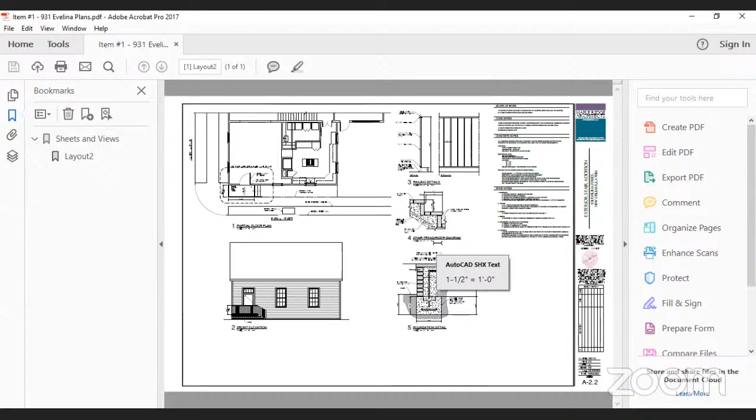Okay, this should be item number 1, which is 931 Evelina Street. Okay, what is the consideration for item number 1? Consideration for item number 1 is a request for a servitude of air and ground rights for steps, landings, and railings over the Evelina Street right-of-way adjacent to the 5th Municipal District, Square 114, Lot 1 and 2. The municipal address is 931 Evelina Street.

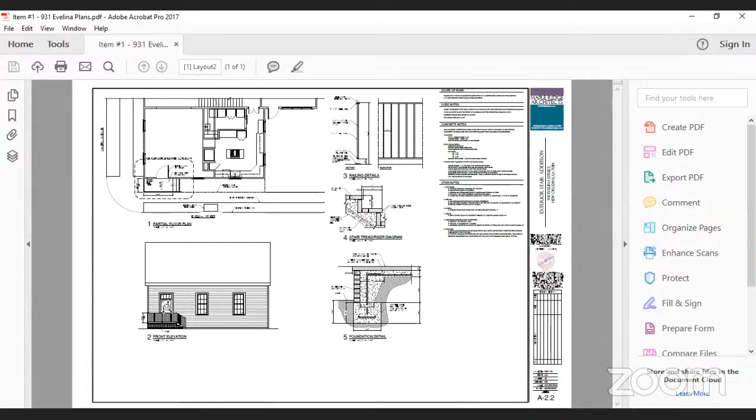I'm not sure if the property owner is here. I don't see him here. Okay, so it's the steps on.

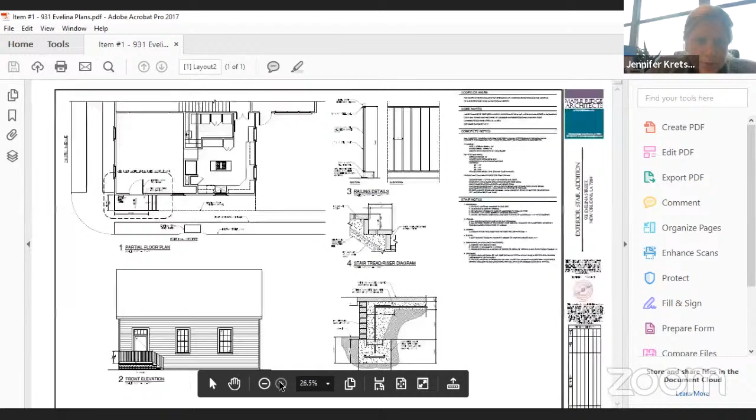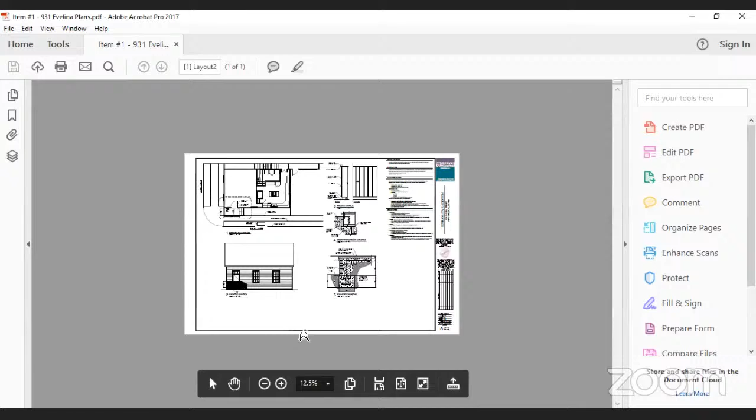Can everybody see my screen? Yes. Okay. Does anyone have any comments?

Oh, I do, Jen. The property owner just sent in some updated plans showing a measurement of the sidewalk. Okay, I can send those to you. And also I can forward those to the committee. I think that would be the information that we need. Don't you agree? What is the width?

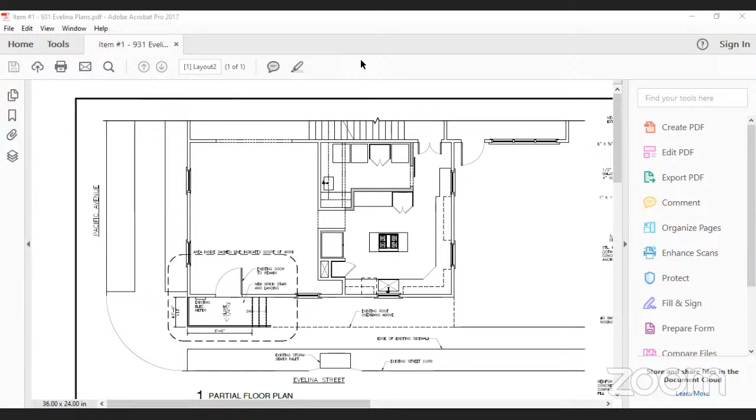Not wide enough. Okay, I'm sending those over now. All right, sorry you guys, bear with us. People sending stuff in at the last minute. That's not cool. Well, I didn't want them to miss the deadline, so I just got them on. I understand.

In the meantime, looks like the HDLC wrote a permit for this work back in November for landing and handrails. You know, what's been presented in the plans that we have don't seem to match what's out there. I don't know if HDLC verified any of that.

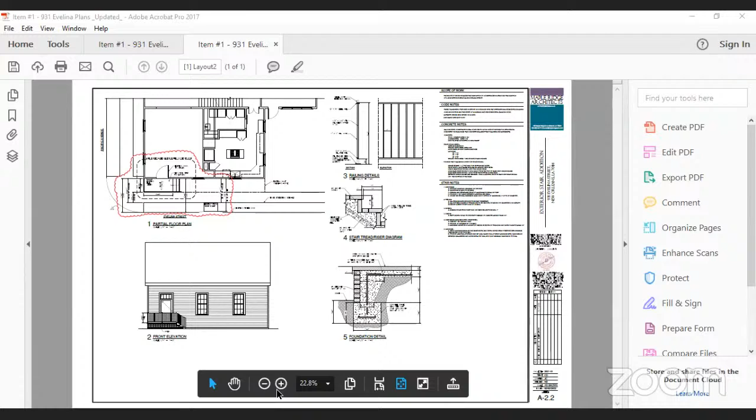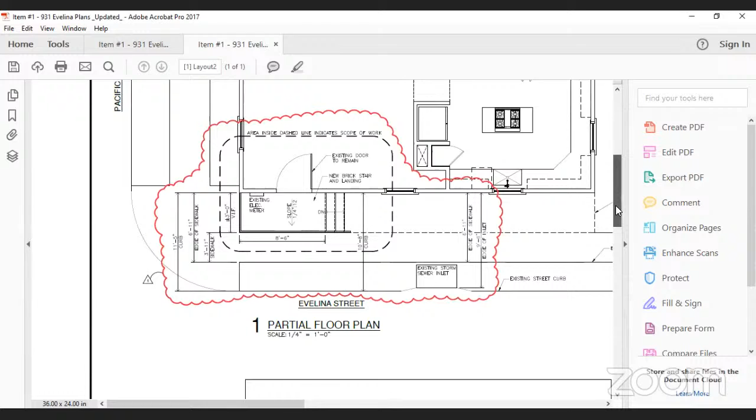So this is to build a landing at the front door? Because that's what we approved back in November. All right, I think there's a stoop there, no, not a stoop, but 3 steps that goes up to the front door. Right. Is this a new house? Because there's not a 3-foot awning on this house. The house I'm seeing looks pretty old.

I don't know. I don't get it. It doesn't look like plans.

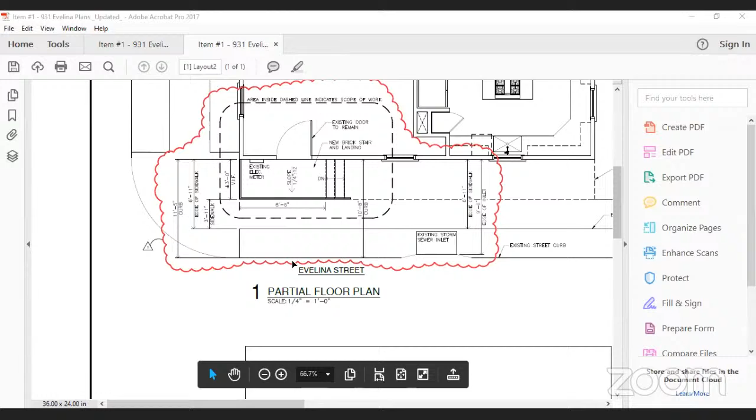I mean, I can see it, but they're showing the sidewalk being 3 feet from the house, same as the eave of that roof. And that's just not the case. Doesn't look anything like that. I mean, this is just another fantasy plan that we get sometimes.

Okay, so Lewis, since I'm not looking at it, let me pull it up so that I know what you're talking about, because I don't know how to resolve this without. So what you're saying is what?

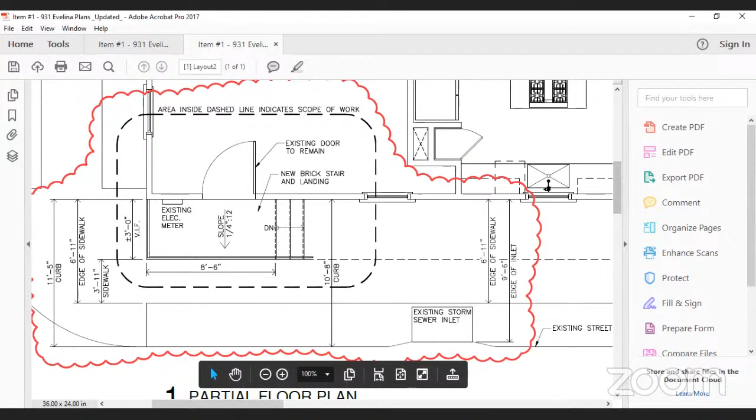What I'm saying is that this doesn't seem to match existing conditions of what they're saying. I mean, what I'm looking at is a fire hydrant, a 4-foot brick sidewalk that's basically against the house, or basically under the overhang of this roof, along with these very short stairwell.

And it seems like they're acting like there's a 3-foot overhang on this house and everything's going to fit neatly under it, and the sidewalk isn't under the overhang of the house, and that can all fit behind an existing catch basin. The catch basin is only 5 feet from the house, there's a fire hydrant that's 5 or 6 feet from the house, so none of this is really... doesn't seem correct.

I agree, yeah. So it's just a made up plan, you know? Is anybody else looking at the street view? Or do you want me to pull up the street view to see what I'm talking about? Does anybody else?

What would be a solution to this, Louis? We would ask them to provide stamped plans from a licensed surveyor. I don't need anything stamped, I just need an accurate drawing. They've been called out. I don't know who drew this, but unless that street has been rebuilt or the house has been rebuilt recently, maybe it has, maybe a year ago on Street View is too much.

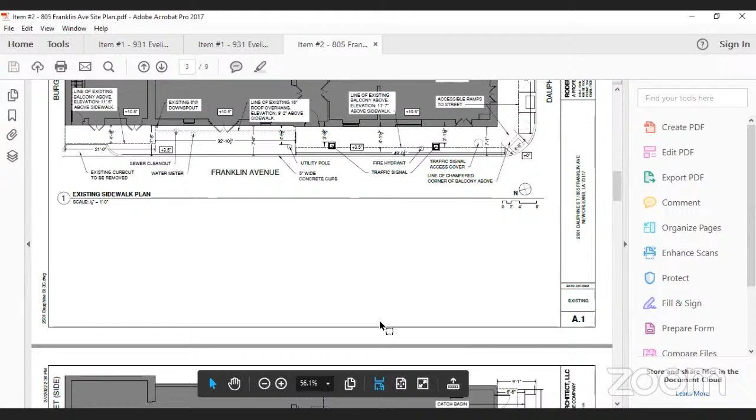And I've already confirmed with HDLC that that existing gallery, that wraparound gallery and the balcony on, I guess, the Burgundy Street side, they're historic. And they're proposing a new awning and also some sidewalk modifications on the Franklin Avenue side in between the 2 existing encroachments.

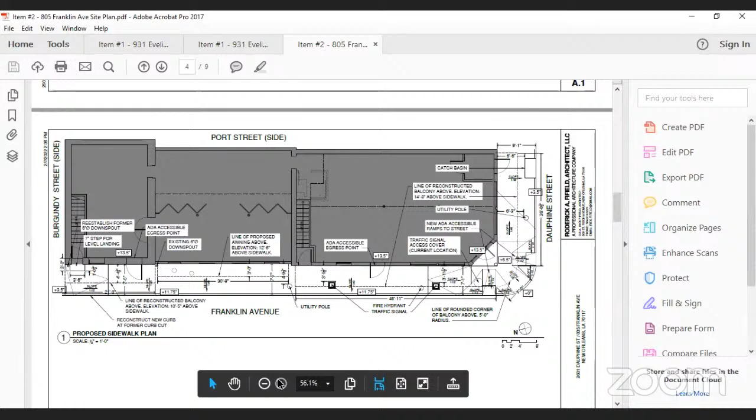Okay, do we have any comments concerning this? This is under review with the HDLC. Looks like they went to commission, and we may be waiting for final drawings. It's not too specific, but it does say approved at commission, so I'm supposing we're waiting for final drawings.

My only comment that you could relay back to them is they're indicating new accessible ramps, new ADA ramps on the corner, unless there's some pressing reason why. I mean, we just rebuilt those corners, so they certainly don't need to replace them. They could just tie into them.

Hi, this is the applicant. Hey. You just faded out, sorry, can you hear me? You're very low volume. Can you hear me now? Sorry, I'm trying to increase my volume somehow. Yeah, we can hear you.

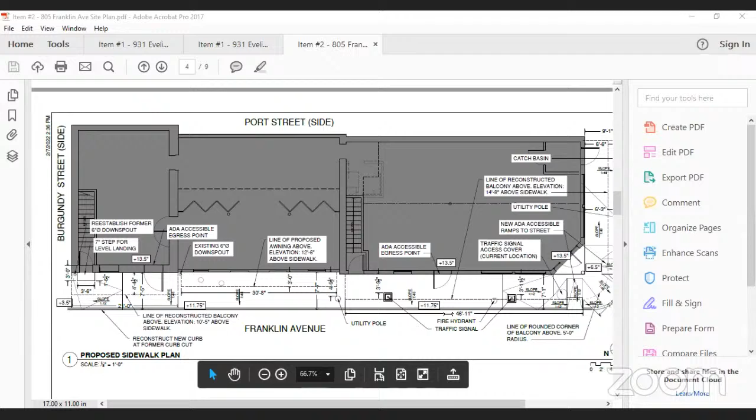You need to raise the bottom of those two doors at the corner 10 inches. The entire building will be lifted and then the first floor rebuilt.

Do you have an entrance? Will you have an accessible entrance at that first door? The goal is to have 2 accessible entrances to the property. Which 2? And all of these openings are going to change. That middle building will be demolished and rebuilt as a 2-story structure.

So I'm seeing, all right, so I got 2 out swinging. Let's see, hold on, let me look at your new plans. All right, I got you. I see the slope going up.

I don't want to have to hammer it too much on this one, but we'll need to work on it. It's possible, we need to work a little more, I think, with you, just making sure we get these small areas fixed up.

And I don't know if you're going to be able to do 2 ramps on the corner anymore. We may just have to go to 1 ramp or something. Although, you got some kind of column on the corner, huh? On the corner, there's a traffic signal access cover that's kind of conflicting with our proposed ramp, as well as a traffic signal.

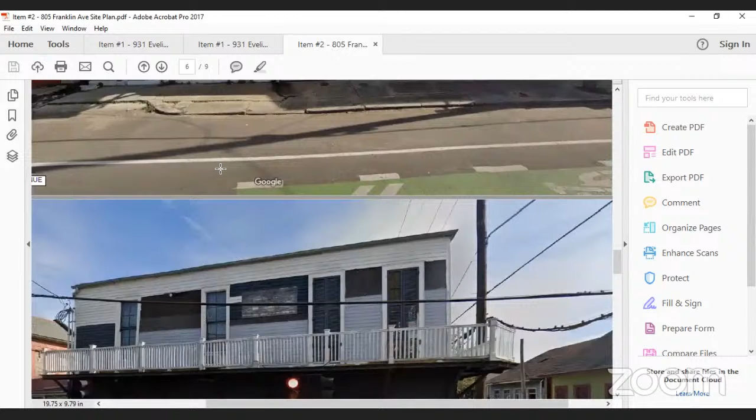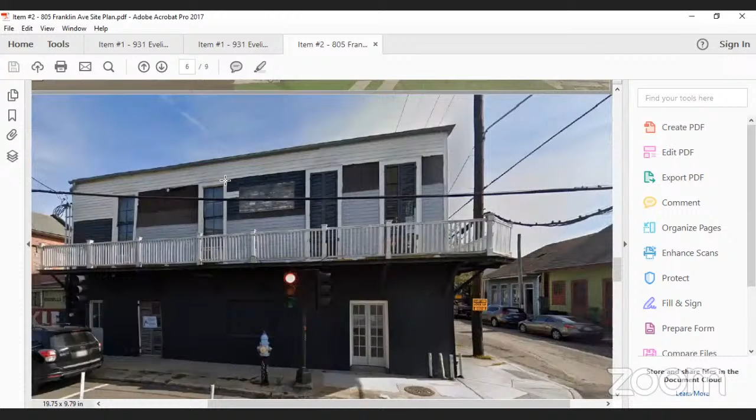How high are you proposing your curb to get? If you go to the proposed plan, it's called out there. It would be about close to 12 inches.

And then you're going to have a drop. You're going to ramp all the way from the street up. And with a new building, you're probably going to need to have street trees in there somewhere.

I don't see that as possible to put any street trees there. There's galleries, utility poles and traffic signals, and the sidewalk in front is about 75 feet long on Franklin, where you say you're demolishing a building and building new. Usually with that sort of thing, you're required to put in street trees.

Yeah, about where that mouse was, right above Franklin Avenue, you're right around in there. So you're going to need to figure out what sort of drop you're going to have, because usually we reestablish a green space.

There's no existing green space on this sidewalk. I understand that, but normally when you build a new building, you're asked to reestablish a green space. I'll defer to Stephen on that, but we wouldn't do a green space here on Franklin. There would be conflict with the power lines there, so I don't think it would be possible. There are trees that exist under power lines, sir.

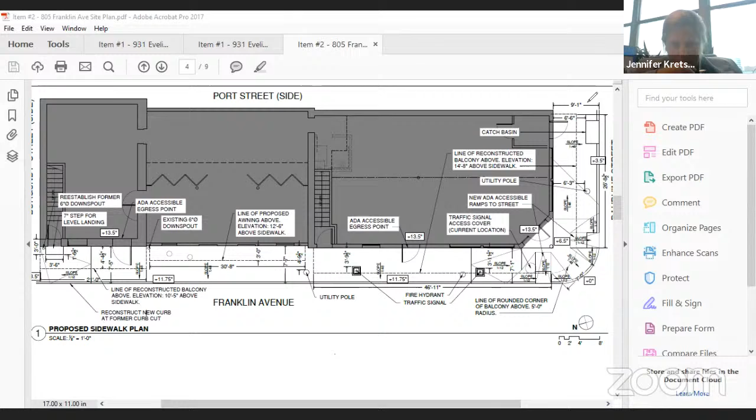No, I don't have any comments. Just have to look out for any - I see you have a sewer clean out and a water meter. Is that where there's a ramp going on Franklin Avenue? Yes, that would be an elevated area. So we have to adjust the sewer clean out and the water meter accordingly. Okay, but it won't be blocked or anything? No, they can remain in the same location, just raised up.

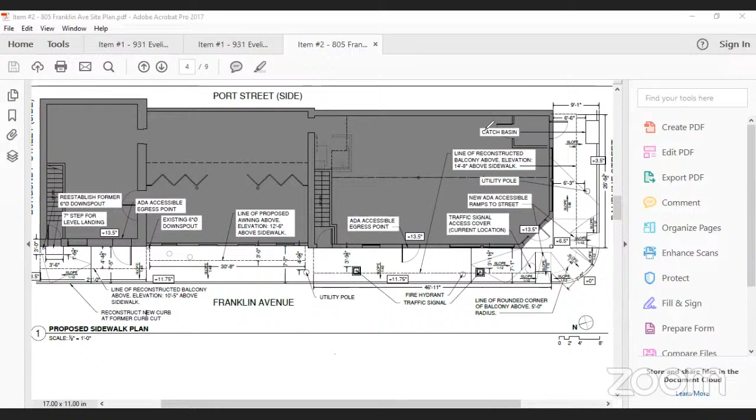That's all I have. Jeremy, is there an issue with this utility pole in the proposed awning? The utility pole I don't see an issue with, but I would like to see more details about the sidewalk, because we do have gas lines under there, and I just want to make sure that they would be okay. Okay, so you want to be looped in on their updated plans? Yes, please.

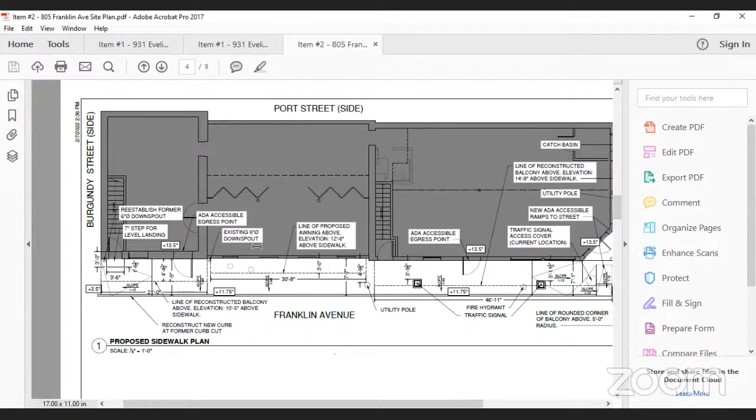CPC, any comments? No, no comments. Thank you. All right, anybody else? Okay, thanks, Mr. Murray. Thank you. I'll be in touch with you on the follow-up. Okay, thank you.

Next item is number 3, and I think it's a reconsideration from two weeks ago, so hopefully it's still somewhat fresh in our minds. Yeah, this is for the ramp, railings, and outward swinging doors over the Freret Street right of way. The municipal address is 2505 Washington Avenue.

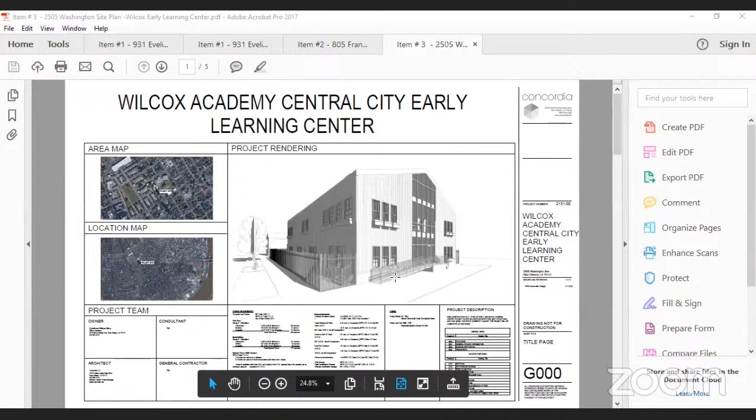Ashley, there are outward swinging doors on the Washington Avenue side for the dumpster. Yeah, we wouldn't allow those outward swinging doors or outward swinging gate for dumpsters, so you would have to find a way to move those within the property line. Noted, thank you. And this is the applicant.

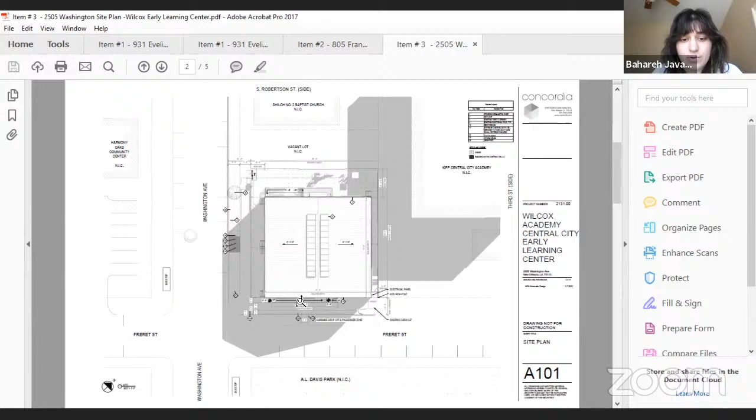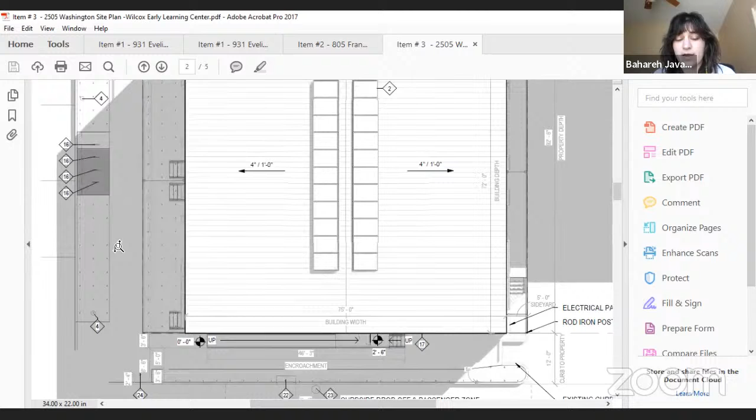So we're just coming back to you after incorporating the feedback that we received from you all a couple weeks ago, with a reduced encroachment request. If you zoom in there, you can see what we modified in the ramp layout. Now we are asking for a 3.5 foot deep by 46 foot 3 inch long ramp and stair footprint, so a total of 162 square feet. This allows for 8.5 feet from the edge of the proposed encroachment to the curb, as well as 5 foot clear for ADA, and then a 3.5 foot landscaped easement where we could plant grass and any required street trees. We also modified the bike parking layout per the comments we received along the Washington Avenue side.

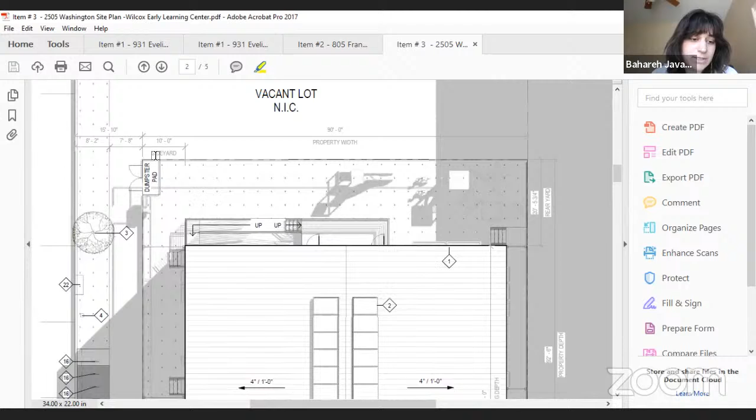And I've made a note about the dumpster doors. We'll adjust that as well.

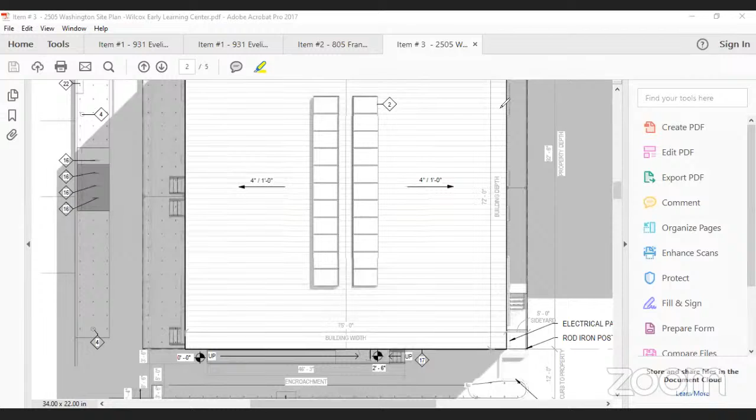While Lewis is gathering his thoughts - in reference to the dumpster, usually you have a curb cut or something to get your dumpster to whoever's picking it up, so I'm not sure whether you're going to have a curb cut or how you're going to get that over to the street to get it picked up. The other thing is you're going to need tree protection, which is 1 foot for every inch of DBH, 1 foot radius, and those are about 30 inches, so that's at least 30 feet.

Okay, so you might want to move your dumpster a little further. Well, wait a minute, is that the end of your property line? That is where the dumpster is, it's at the very far corner. Okay, because I'm thinking that might be problematic. We'll have to have our arborist review as to what paving or how you're going to be able to handle that.

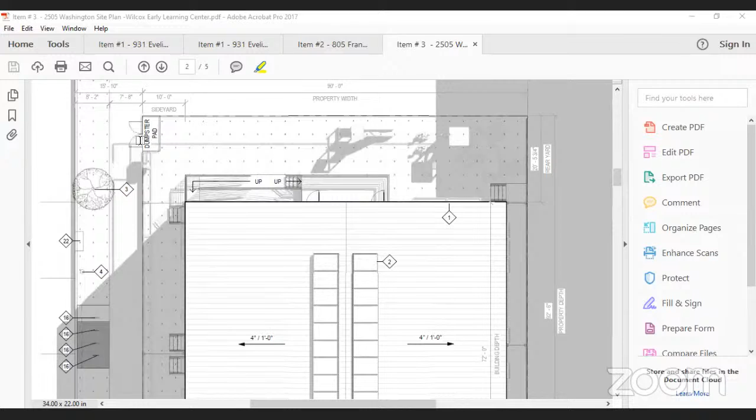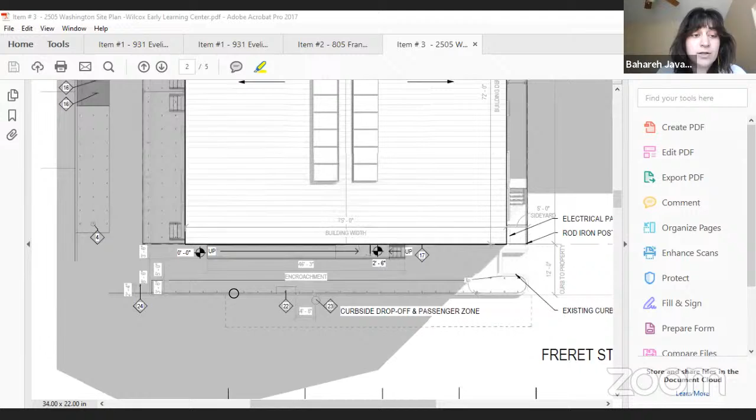And maybe, Stephen, I don't know - I'm assuming you're going to have some tree planting on this. Yeah, we're not showing any because I wasn't sure yet the extent or how many trees would be required, but there's certainly room for it. On the Washington Avenue side, I have a little bit of concern. I know you had mentioned last time that we would be required to plant live oak trees on the Washington Avenue side - that existing live oak tree on the Washington Avenue side has a pretty wide canopy.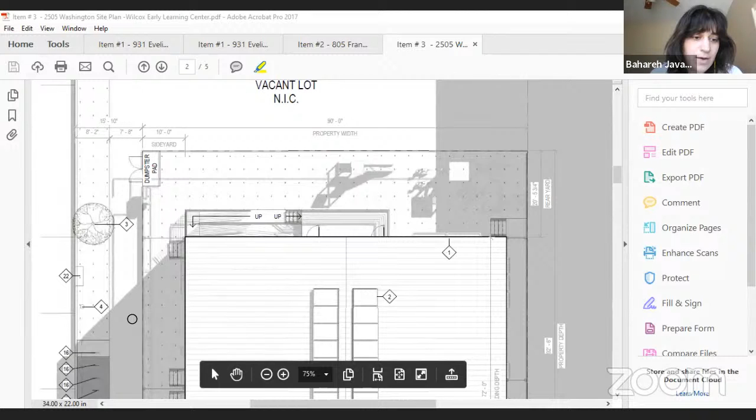If you look at it on Google Street Views, you can see what I'm talking about. I'd be a little concerned about where it's located in terms of the center of the tree trunk, and how much room there would be to plant another live oak tree, which would eventually have another large tree canopy. So that would be something we'd want to work out with you all.

Well, we'll be glad to work with you on that. But usually, if someone's scrolling faster than I can watch... anyway, there may indeed be room, or we'll go with a smaller tree. Usually we like to go with the live oak to continue the canopy. So I think there might be room.

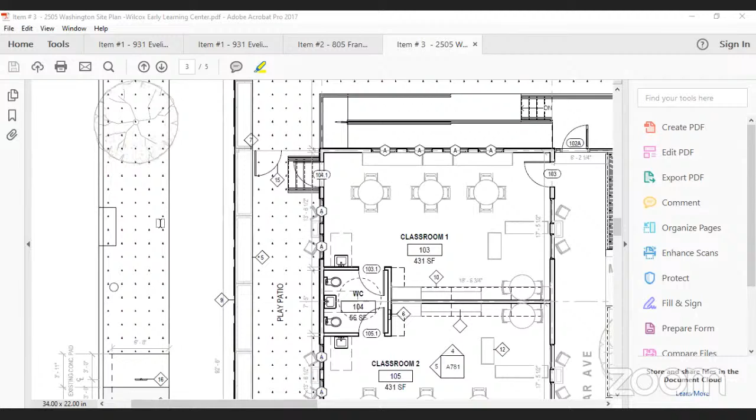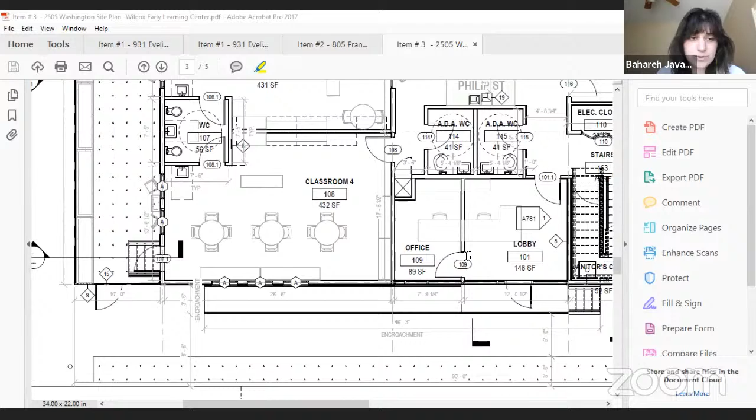Just because that's the existing sidewalk doesn't mean it couldn't be moved, right? The crosswalk to the street where you have the bicycles. Yeah, no, we can relocate that. So, keeping that same configuration, but maybe adjusting it a little bit might give us a little more room to deal with that on your landscape plan. Sure. But I'm going to need to see the tree protection plan before we go any further.

Okay, and the resolution of the dumpster. Okay. All right. Generally, DPW's comments followed, so that's good.

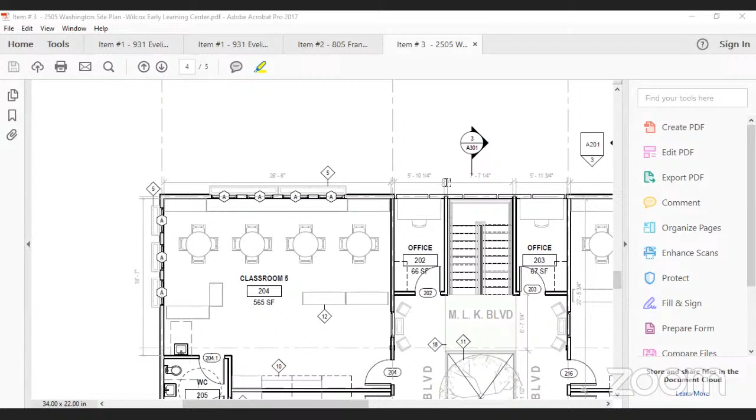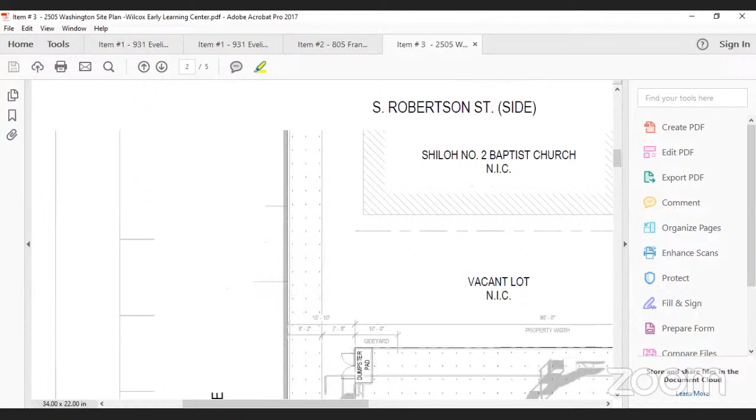There is one little concern that I didn't catch before. You need to show the existing catch basin that's on Freret Street on the plans, and the sidewalk actually narrows as you go upriver from that catch basin. The street gets wider towards Washington. So you do need to show that accurately, if only to get the landscaping plan right. Okay. So that's going to kind of squeeze your sidewalk, and you're not going to be able to plant basically beyond that catch basin anyway. Okay.

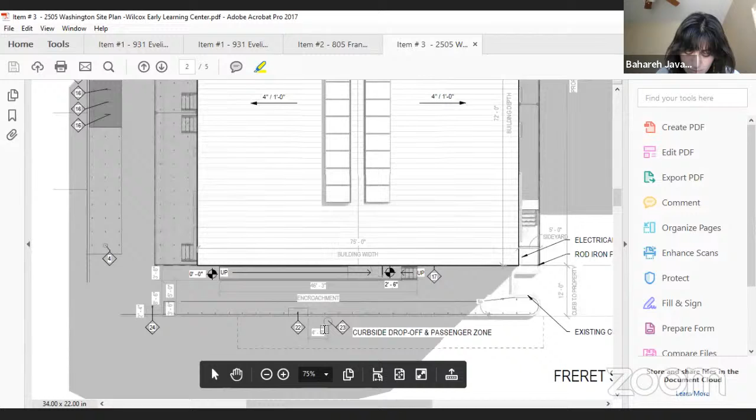We'd look at alternative compliance in that case. In terms of what's shown, I think it's fine, but I would like to review that once you have the curb line corrected. Sure.

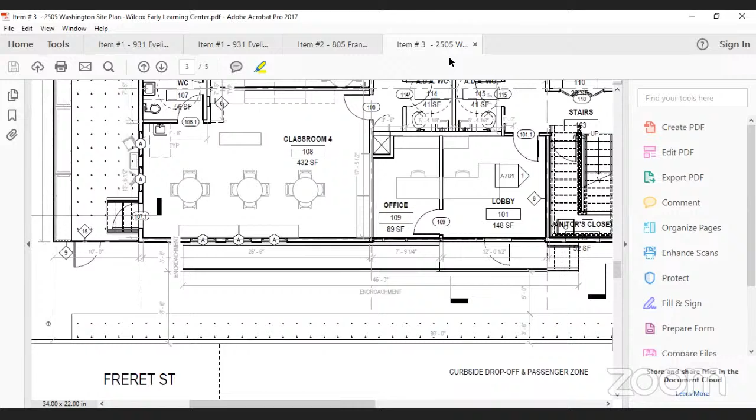Any other comments? LaJoyce, did you have anything? No, I don't have anything. Okay, I couldn't remember if you had some from last time or not. Okay, all right. So we are going to take a 2-minute break for public comment, and then we're going to come back and vote on these 3 items, unless anybody has anything further on item number 3.